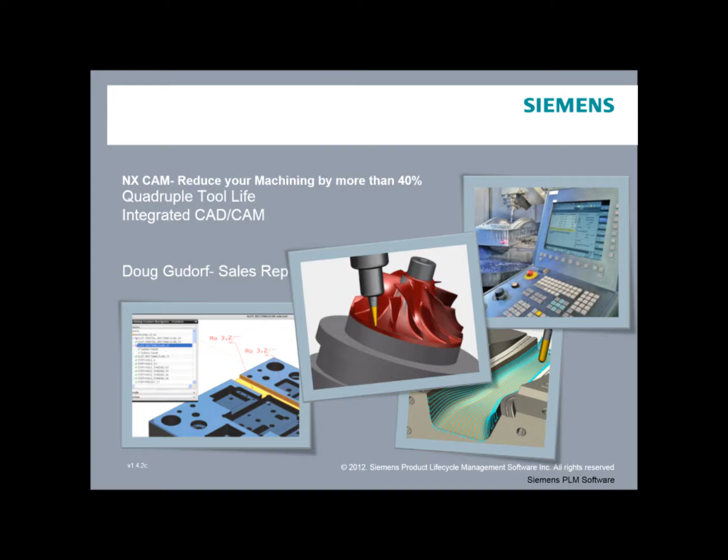So who is VMH? We obviously represent the Siemens PLM software suite. We're a platinum reseller for Siemens, and we have support. We have guys that handle any kind of technical issues that you guys may have, or questions, or whatever it may be involved with software.

We do training, whether it be on-site, off-site, or we can also send you to the Siemens PLM direct classes. We have something called a dream team, just some young guys that are engineers that solve issues and problems that we have aboard. And we have mentoring, which is we come on site, we take a look at what you're doing, kind of stand behind you and make sure you're doing all the right good things.

These are the industries we typically focus on: aerospace, automotive, electronic, medical, and machinery. We do step outside the boundaries, do a lot of job shops. But most of them fall within some categories, and you guys probably do work for some of those or make parts for those. Those are our core industries.

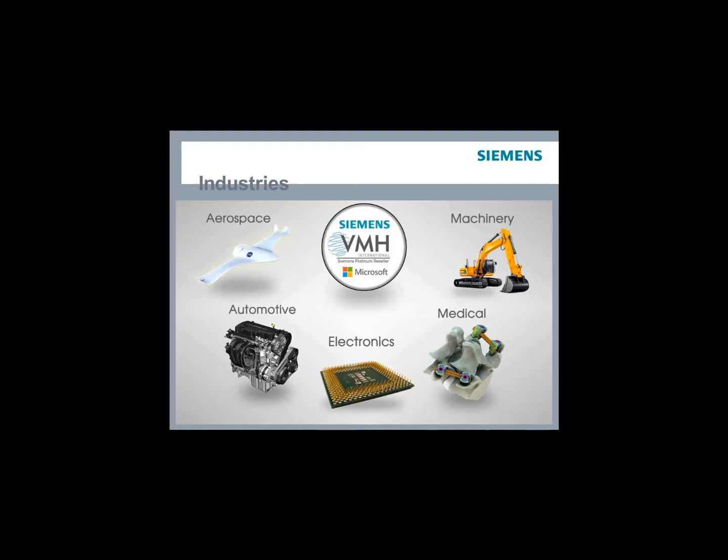The nice thing is we were one of the first partners to partner with Microsoft on the cloud-based Teamcenter product, which seems to be a huge advantage. And obviously we have a mobile training center. We can bring laptops on site. We work with technology partners, whether you guys are buying Mazak, Makino, the Pumas, we have posts and machine simulation developed already. Supplier programs, we work with GE Aircraft, work with different suppliers to get them software so they can integrate better into the OEMs.

And vast industry knowledge. I've been doing this 16 years. I came out of college with basically a quality degree, any kind of inspection, anything to do with engineering. I've worked with a lot of owners, a lot of private equity guys, and I'm just always looking for better ways to improve the process, and that's why we're having this conversation today. Next slide.

Why would anybody look at CAM? People don't realize that formerly Unigraphics, now NX CAM, we've been around. It's actually over 30 years, probably 35 years, back to the McDonnell Douglas days. The first programming language was UNIAPT, so it came out of a CAM package. We built CAD on top of CAM. That's why our CAM is so amazing.

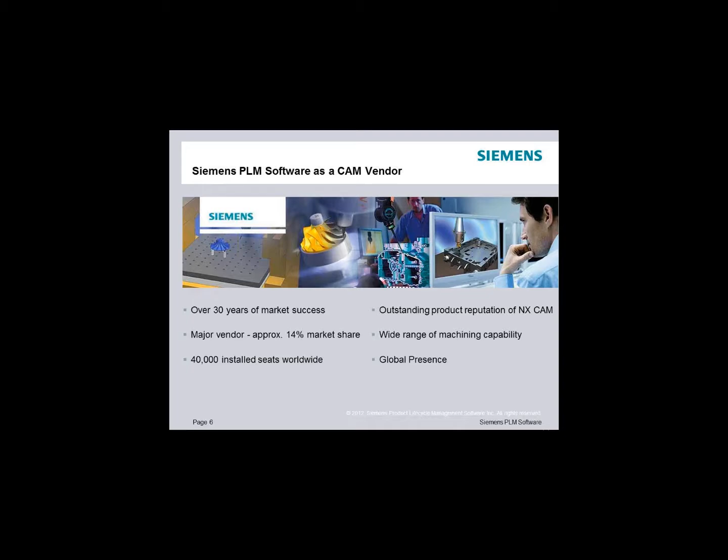We've got 14% of the market share. We're probably number 2 in the world as far as market share on the CAM side. We've got a great NX CAM product. Got a lot of users, a lot of successes. We'll talk about those. And we got a wide range of machining capability. We can do mill turns, 3 to 5 axis milling, wire EDM, or lathe. We do have a global presence. We're in almost every country, and 40,000 installed seats worldwide.

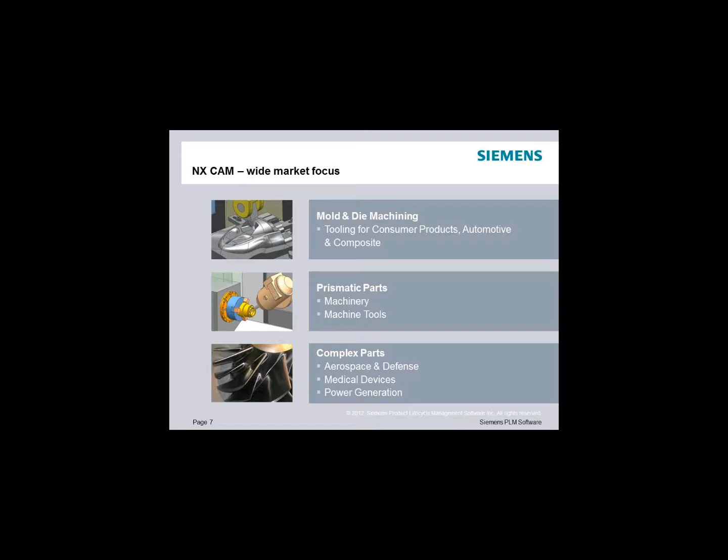These are some of the industries we do real well, and you guys are probably familiar with doing mold and die machining, which is complex surfacing, prismatic parts, round parts, simple parts, and complex parts. As you see that turbo machine, that blisk right there, for any kind of medical device, power generation, or you see aerospace cutting those large turbine blades.

We want to talk about the strategies towards the end as far as what tool you use or what machining technique. And every machining technique doesn't necessarily mean it's bad, but everybody does the software its own way to make it work. But we'll see with the volume mill and with their approaches. Next slide.

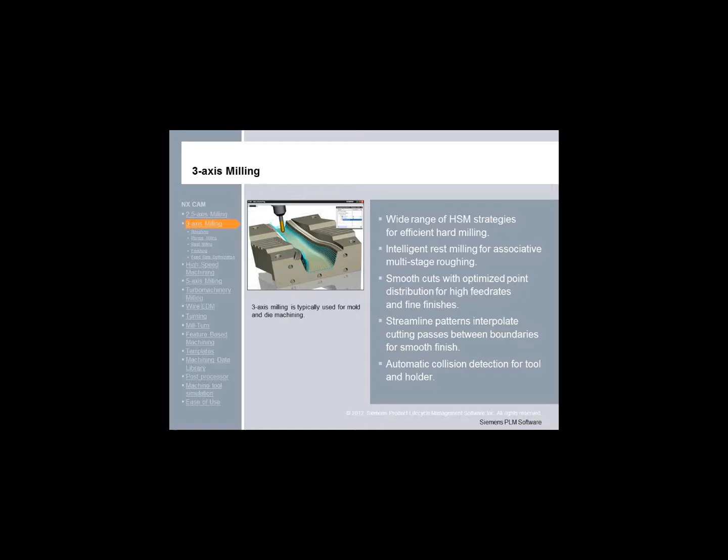So you see typically when you're roughing out material, we were the first ones to come out with high-speed milling, which is the NURBS, the non-uniform rational B-spline information, which basically is just saying, hey, if you go into a 90-degree bend, let's smooth the tool path out so it doesn't go fast and then slow down and then go fast, which is bad on the tool and bad on the machine and bad on everything. Automatic in-process workpiece.

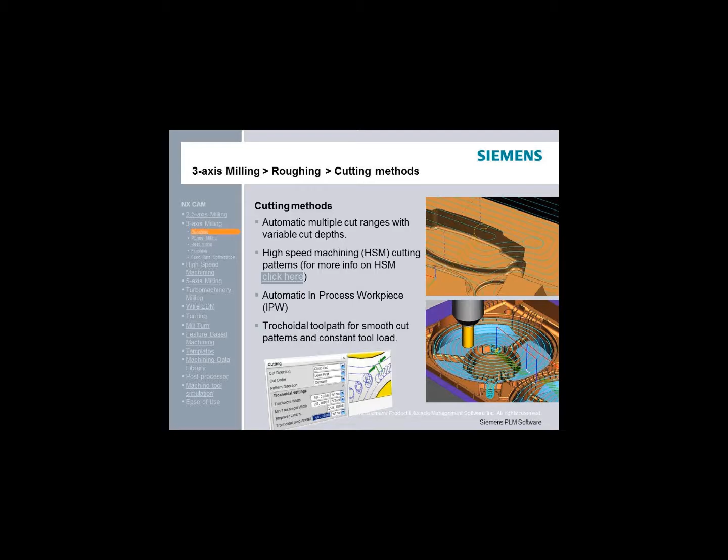So the IPW on the workpiece basically keeps track of all the uncut material. And then trochoidal, you guys are familiar with that particular method, you can kind of ramp in at circular movements, and then come back out and hit it again with circular movements with the cutting size of the tool.

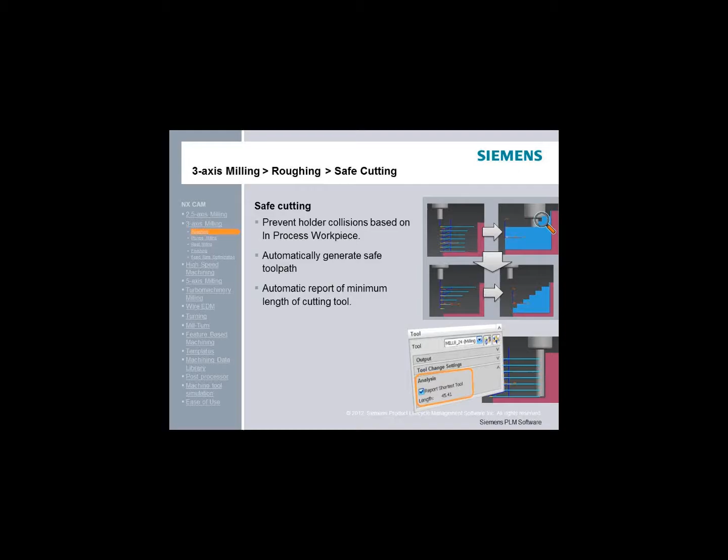Next slide. We just talk about safe cutting. I have a lot of customers asking about this too. You know, how do I know if I have a holder collision? Now we have a way of detecting this. We can also report the minimum length of cutting tool. So if you're doing a certain depth, you'll know how deep you can go with a minimum cutting length tool before you bang into the material itself. Next slide.

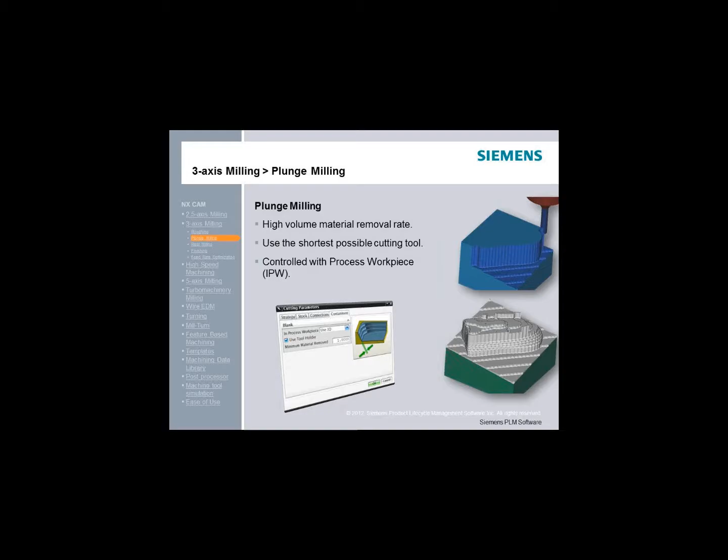Plunge milling, high volume material removal rate. Use the shortest possible cutting tool. So when you plunge mill, you want to make sure you're not banging your tool into your part and destroying your part. And I said that we control the process workpiece, because I know where the geometry is at, I'm going to leave a certain amount of material. The tool and the toolpath know exactly what's going to hit on the next pass. Next slide.

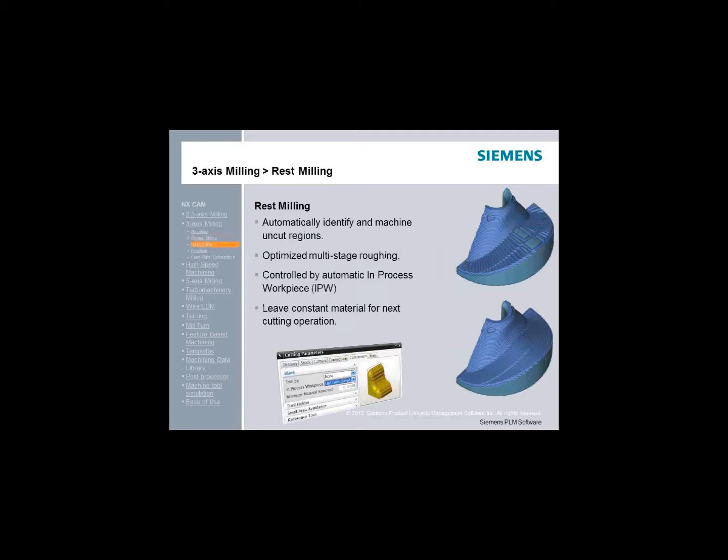Rest milling. A lot of you guys do rest milling operations. Leave constant material for the next cutting operation, which is what you guys want. You don't want to see a big chunk of material you weren't ready for. Next slide.

So we have specialized tasks. This is a high material removal rate. We have things like chatter-free machine parameters. You guys don't want any chatter because you don't want to get faceted side parts. So for trochoidal milling, consistent tool loads, so you know exactly what the tool is going to face when it goes in the material, when it comes in and out of the part. So there's all kinds of new advantages, new intelligence we build into the software.

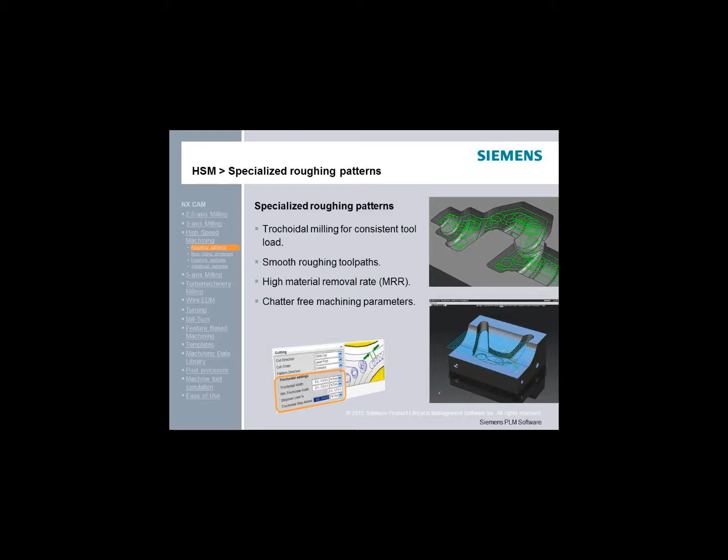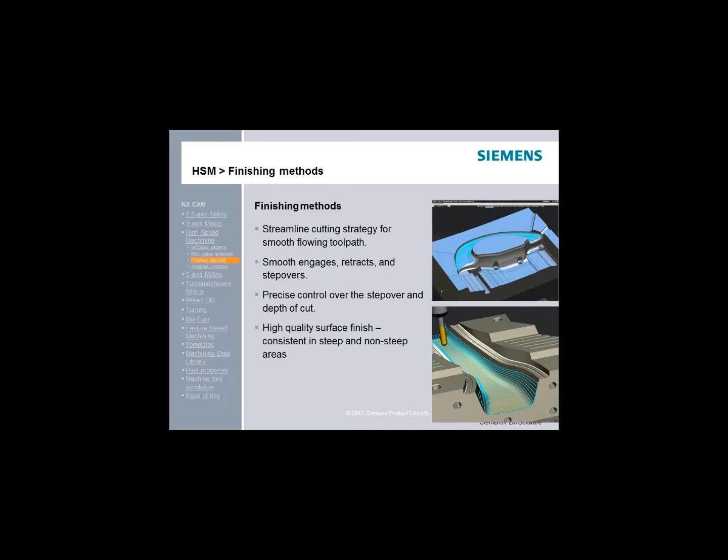And then finishing, you guys care about finishing. You want to make sure you get smooth engages, retracts, step overs, whatever control you want to have to finish the part. So you either don't have to hand polish it, or you can get it right off the machine. I've seen people do it right off the machine and get a good part. Next slide.

5-axis milling. A lot of people are getting into 5-axis milling. It reduces your multiple setups, which rolls back into reducing your machine time, right? When you've got to do multiple setups, you've got to do multiple fixtures. There's all kinds of stuff that goes into that. We do 5-axis extremely well. I've done a lot of different customers. A lot of people position the 4th and 5th axis, but we do true 5-axis milling. Next slide.

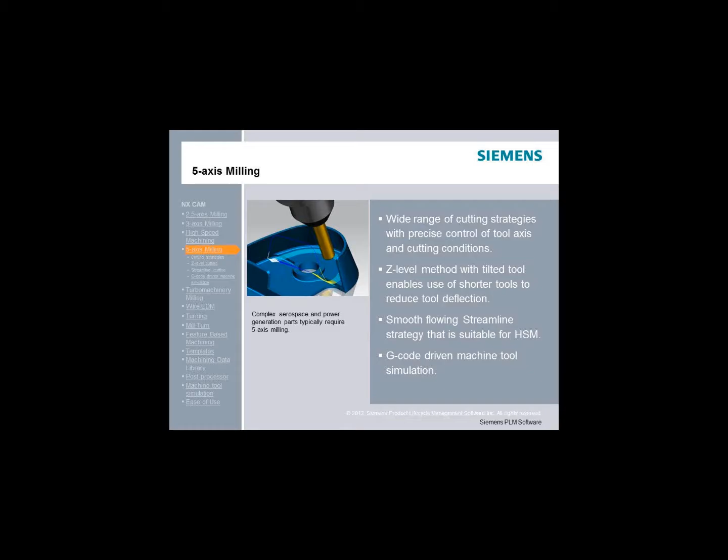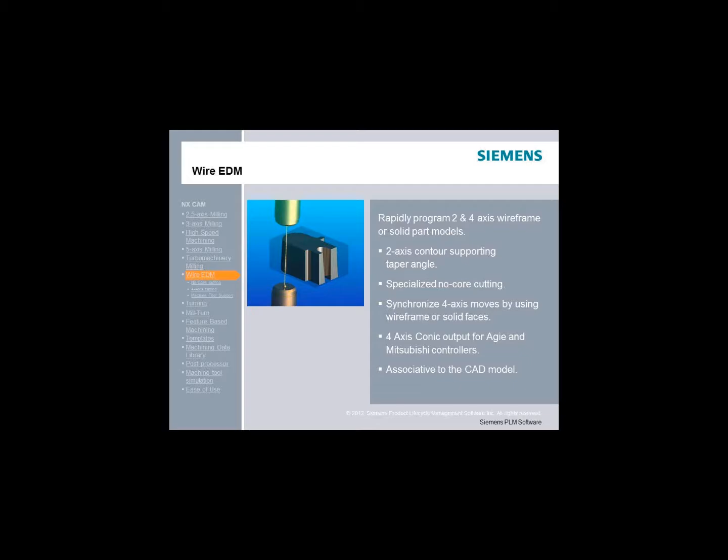Wire EDM. This is another integrated piece of the package. Next slide. Turning. So as you can see, we have full manufacturing suite capabilities. Next slide.

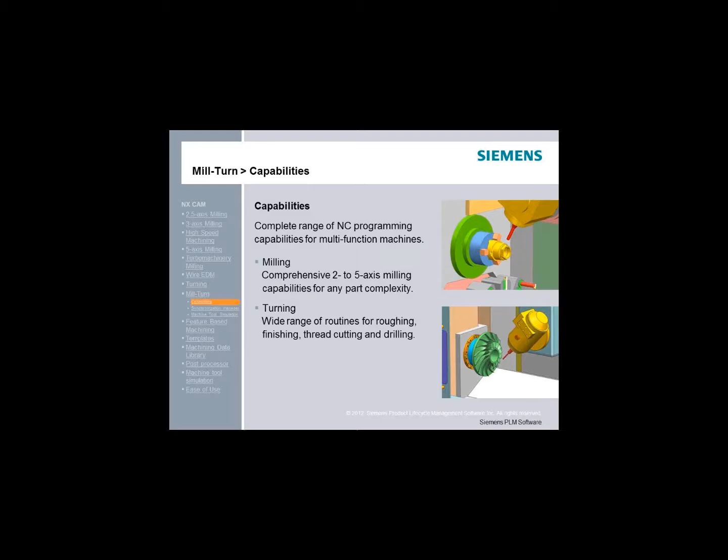And then mill turn. You guys doing some milling, some turning. A lot of people are getting into mill turn operations with multiple turrets. Go ahead, next slide. Synchronization manager, that's how we sync the heads. You're basically posting out a lathe program and a mill program, and integrating them together to make sure the speeds and feeds all sync up. You obviously want to do that when you're machining multiple parts. Next slide.

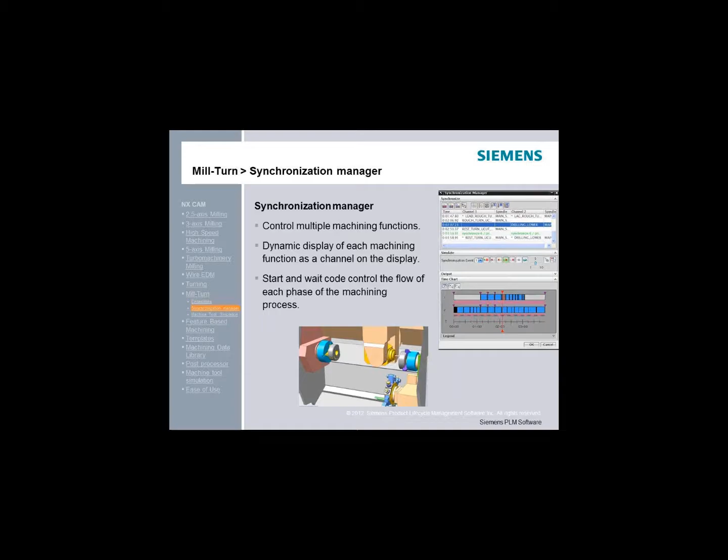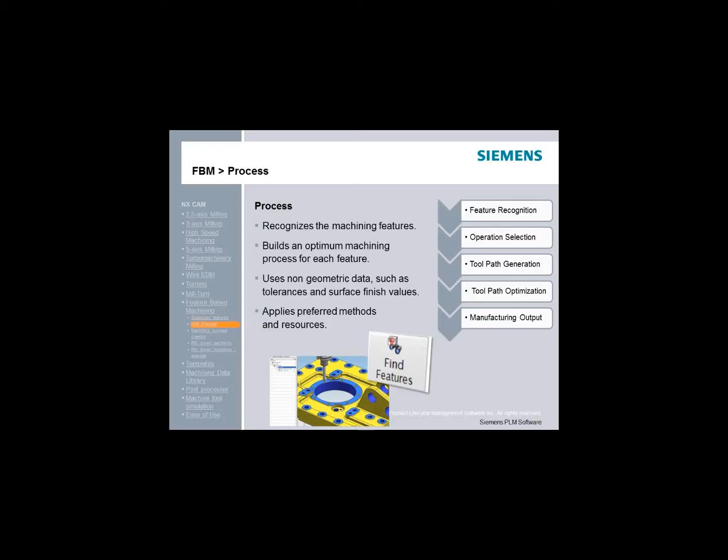So the feature-based machining, people always ask about that. Is it going to recognize holes? Is it going to recognize certain features? Yes is the answer, and it's getting more and more powerful each day. So you see a hole with a ½ inch, it knows the depth; as long as the solid model is intelligent, it will pick up all that intelligent data. Next slide.

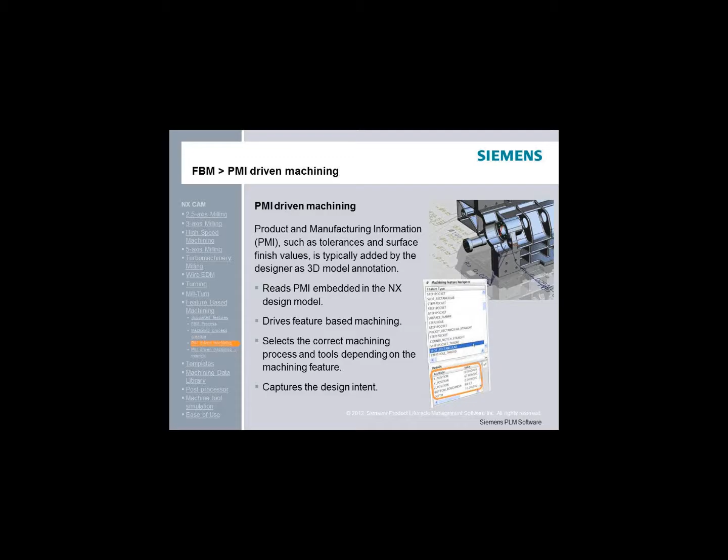And a lot of people are driving the PMI. I see this more often than not. Driving the PMI data for your CMM programming, so it picks up all the PMI information that's embedded in the model itself. It's a nice way of just having everything driven through the PMI to make sure you're staying in tolerance. Next slide.

Templates. I'm real big on templates. This is part of your savings. Why reinvent the wheel? Once you do an operation, you know your speeds and feeds, you know your spindle speeds, you know the material you're cutting, you know what cutters you like, you have your standard cutters. Once you program a part, why not copy and paste to the next operation, and then you can just adjust your different geometries or whatever else on that part.

I see so many guys reinventing the wheel, going through the ladder, as I call it, and it just takes too long to pick all those pieces. I would just copy and paste to the next operation. That's where Barry has been so successful. Next slide.

So your machining data library. On those end mills, it tells you what kind of material you're going to cut, and basically any intelligence you would need to know for the type of steel you're cutting. Like if you're cutting hardened P20, D2, A2, any kind of hardened steel, it's going to have all the intelligence built into it. And keeping track of all this makes your life a lot easier.

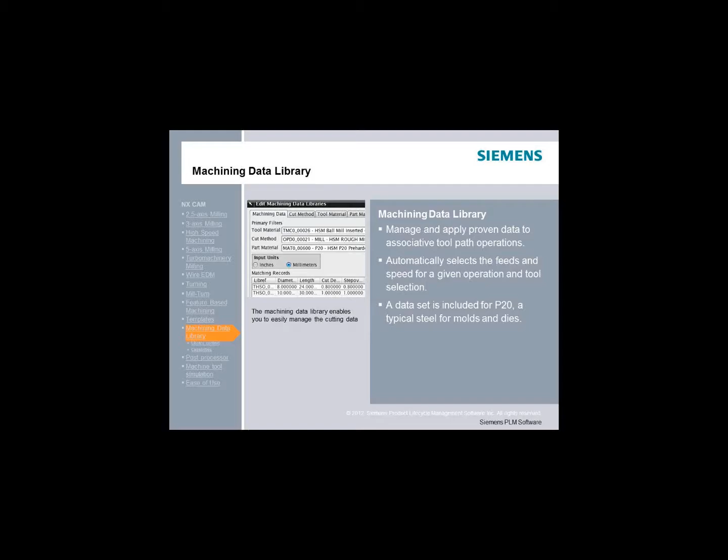Instead of going to the tooling vendor saying, what type of material can I cut, how many flutes do I need, how big of a tool, you can use standard tools to do all these different things. Next slide.

So the machining data library enables you to basically manage your cutting conditions. You're probably cutting similar materials each time, but you want to do them more efficiently every time. And you certainly don't want to be dry running machines or testing out G-code when you can be cutting parts. You could use simulation like a Vericut package where you're doing offline testing of your programs and not dry running your machines, which is another savings. Next slide.

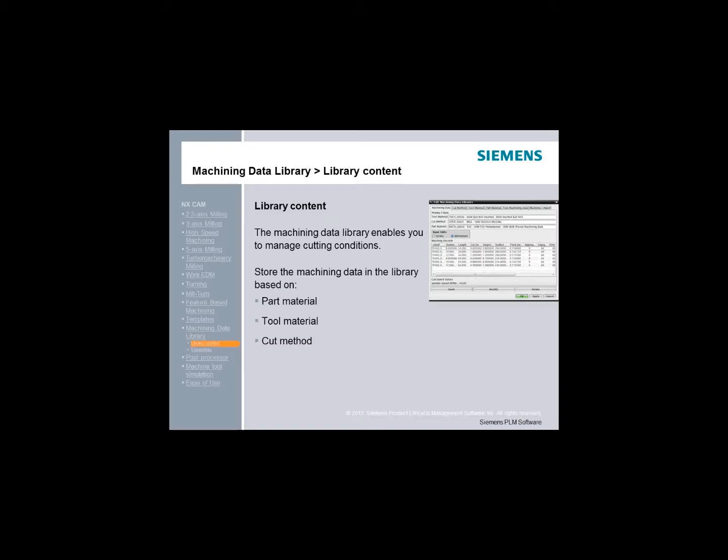Post-processor, you care about that, whether you have a Mazak, Makino, Hardinge, whatever you may have. We have a post library. You can either build your own posts, or we have posts online, or we can develop the posts for you. You can also go outside to ICAM or InterSim; they write external posts as well. So you have different options to get your data out to the machine. Next slide. This is basically our post library.

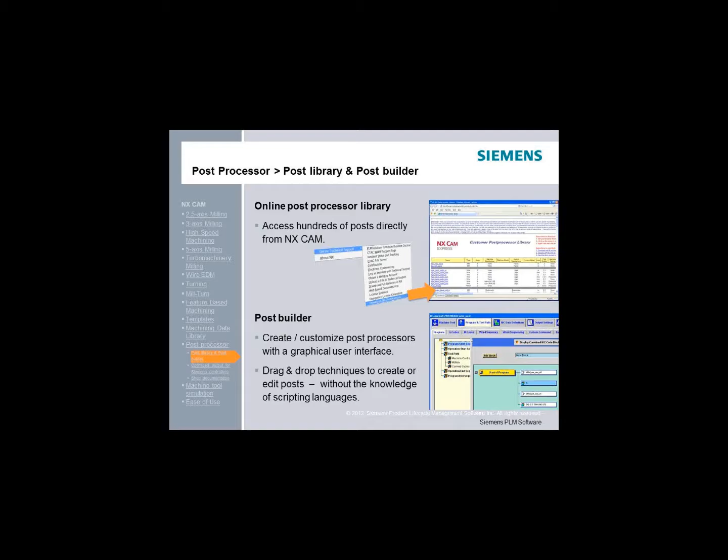And this is probably the number one question people have when they buy the NX CAM piece: how do I make this more efficient? And if you have an existing post today, how do I optimize the data coming out of my post? We can help you with that as well. Next slide.

And I know Barry uses this for his setup sheets for shop documentation. The guys on the floor want to know a T01, T02, T03, what kind of tool it is. Barry defines all that, so they know a T09 is a 5/8, for instance, and what they're looking at on the floor. It also keeps track of the IPW, so the guy knows when he gets to a semi-finished operation what the part looks like. If something's out of whack, he can say, it doesn't look like the photo.

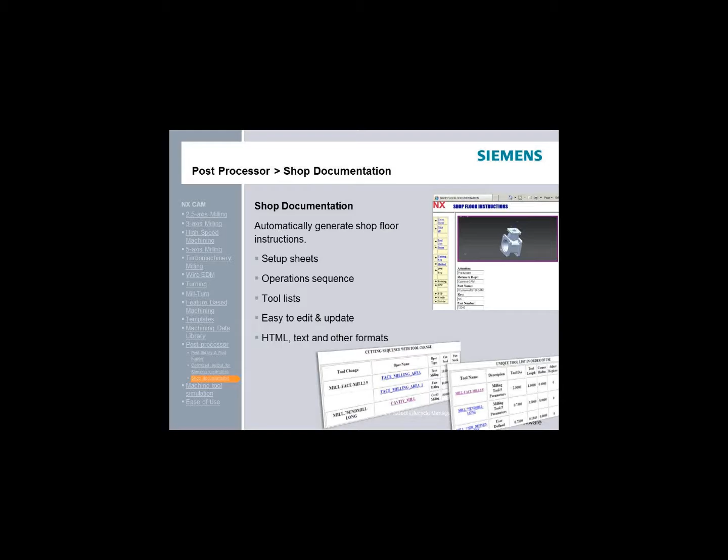It can be HTML based. They can click on this and have an interactive live viewer. It's really endless, and you can customize it just for your shop floor. You could have XYZ custom job shop, cutting part 1, 2, 9, 10. Next slide.

Ease of use. I know we're talking about reducing machining, but with ease of use, you want your guy to not use it for a couple of days and come back and know exactly what to do. We're trying to make the interface and the menus a lot easier. We talk about templates, we talk about all the important things. All these play into making you more efficient. Next slide.

So with the interface, we're allowing you to make your jobs go a lot easier, and you can find different things because we do so many different things. It's just easier to have a command finder. You can go out and find stuff. Next slide.

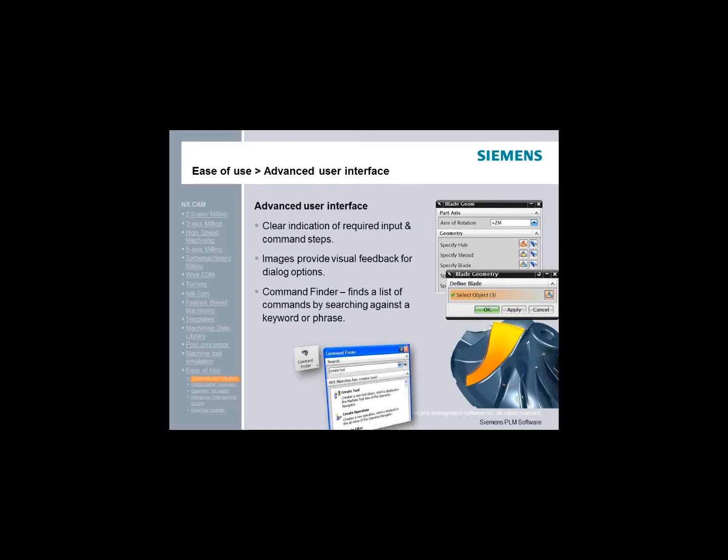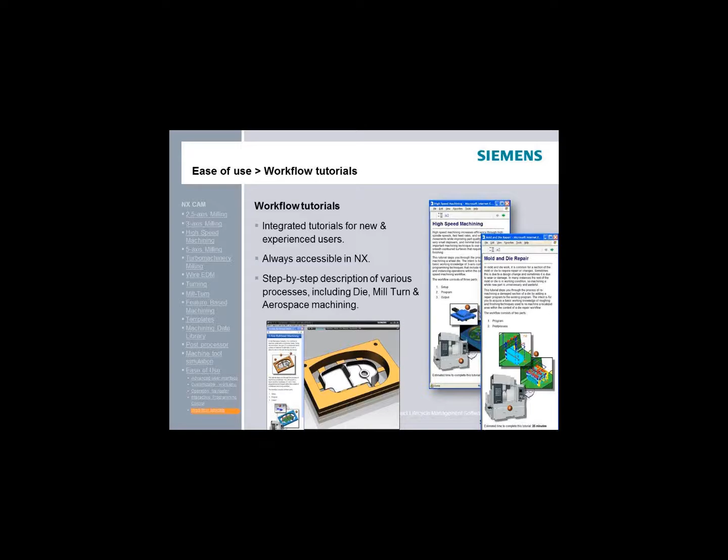What does it do? Roughing operation. What's the majority of your time? Roughing the material. I hear guys could take 10 thou off a part, or an inch and a quarter at max, at max speeds. So we're able to use the side of the tool instead of the bottom of the tool. Like an end mill, we're using the flute length to cut the part. It's a new, different way of thinking.

Every time someone shows someone the part, if they're cutting it... I did a test cut at SC Tool and Mold. One part went from 8 hours and 30 minutes to an hour 10, which is significant savings, but it was a whole new methodology, and they're getting 4 times tool life out of those tools.

So we're talking about reducing machine time. What does that mean? It means if you have a CAD system and a CAM system that's integrated, that's going to play into it. How do I set up a template? How do I make things easier? How do I keep track of the standard tools I use? Because the more standardized tools you have and not specialized tools, you're going to save yourself some money.

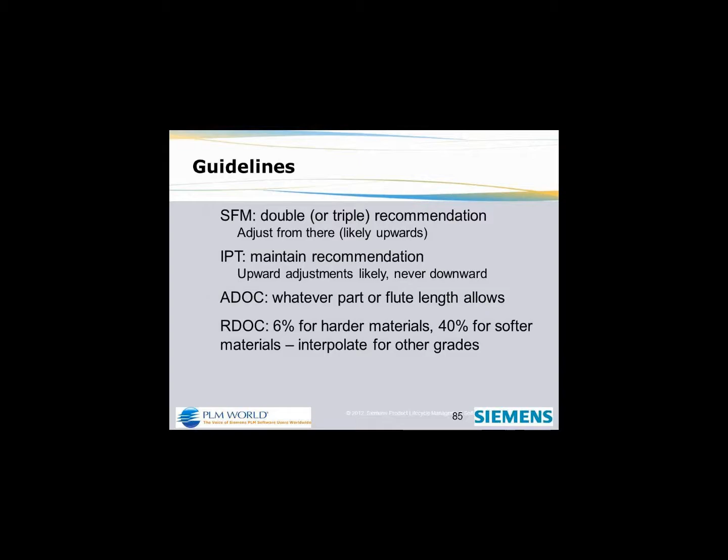Why VoluMill? I've been selling VoluMill for over a year now. To be honest with you, I didn't know that I believed it in the beginning until I saw a part cut at AFC Tool. When I saw the part cut, I thought, wow, there's a lot of time that's spent hogging material out and very conservative ways of machining. But no one has that advantage anymore with the overseas competition.

You've got to make things quicker, faster, optimize tool life, and you just don't have the opportunity to machine the way you used to machine. So I saw this, and I thought it was an opportunity for American manufacturing to take advantage of this new technology. For $5,000, its payback is literally 2-3 days on some of these jobs I've done. It's inexpensive. It's simple.

Literally, if Barry spent a half hour with you, an hour, you're going to grasp what he's saying and what he's doing. It's unobtrusive. It runs inside NX CAM, CAM Express. It runs external to Gibbs, and whatever you may be using, it will work. It has an immediate impact in ROI, which means, if you're machining an 8-hour part in an hour, it doesn't take you a while to figure out that you're saving a lot of money. You're able to quote jobs a lot cheaper.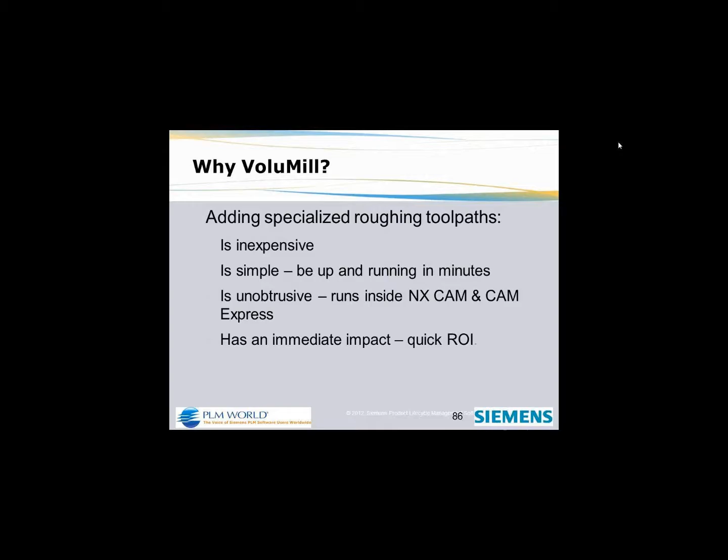I've been doing this a long time. I've seen VoluMill will save you a lot of time. The way you approach the machine operation, having the operators believe in the process in which they're not cranking down feed rates, that's what kills everybody. They're getting conservative: I want to take an inch depth cut, I want to take a 1/4 inch depth cut. So you got to kind of trust the software and what it does. Next slide.

So let's get Barry on the phone here. Let's have a little conversation with him and ask him a few questions. How you doing, Doug? Hey, Barry, how are you? Doing fine. Glad you can join.

As you know, I've been calling AFC Tools since 2005, and I sold some of the first seats to Rob Kyra. I think you were joining the board just about right then. You guys have come a long way. Why don't you explain where you were in the beginning and where you are now? Because I think that's a drastic difference. And I want you to talk about what VoluMill has added as an additional icing on the cake, so to speak, for NX CAM.

Well, within the last 5 years at AFC, we've gone from sending out any type of detail that required the machine to move in 3 axes, i.e. X, Y, and Z, to adding first a mid-size Hurco, a 3-axis machine, and then a large Hurco, basically a 64-inch X travel with the addition of a 4th axis. And then our latest, a 3-meter bridge-style 80-horsepower Hurco, 4-axis capable also.

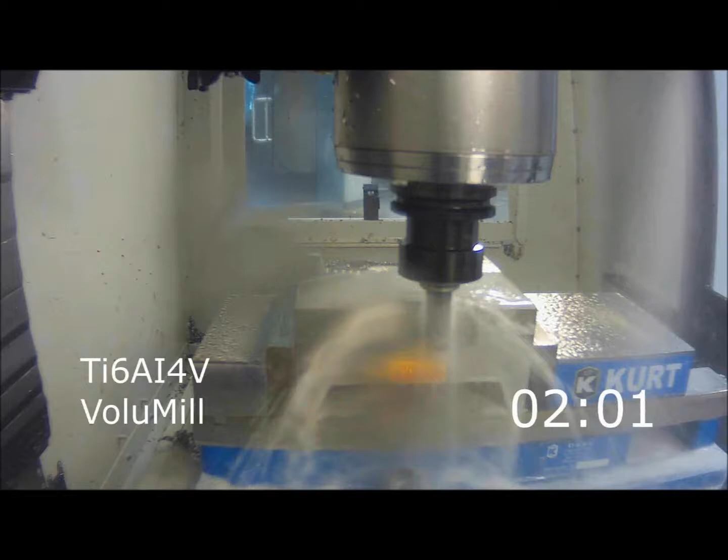So before I get started with NX CAM, I'm just going to play a video. We went to Sandvik in California for a VoluMill event, and we took one piece of titanium and split it in half. We did one half with VoluMill, the other half with the conventional cutting method, so we can see the difference in how long it takes.

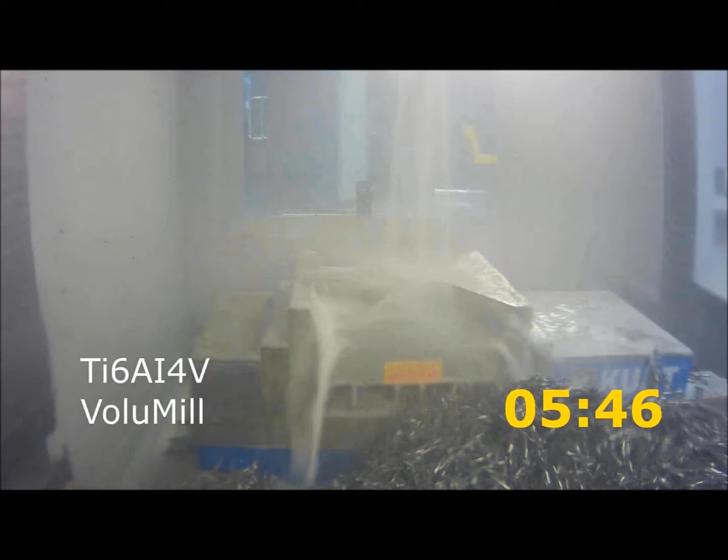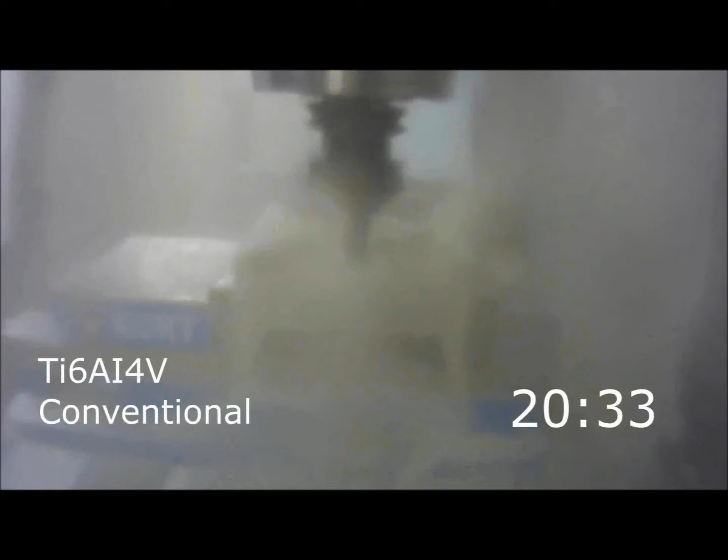So with VoluMill on a piece of titanium, as you can see, it'll stop around here. It took about 5 minutes to do. And there's your finish time, 5:46. And then after that, we did it with the conventional method, all on the same day. We had this over lunch, with all types of companies there as well. And here, we're already at 20 minutes, and we're not finished yet with the conventional method. So already, it's 4 times as much as VoluMill took.

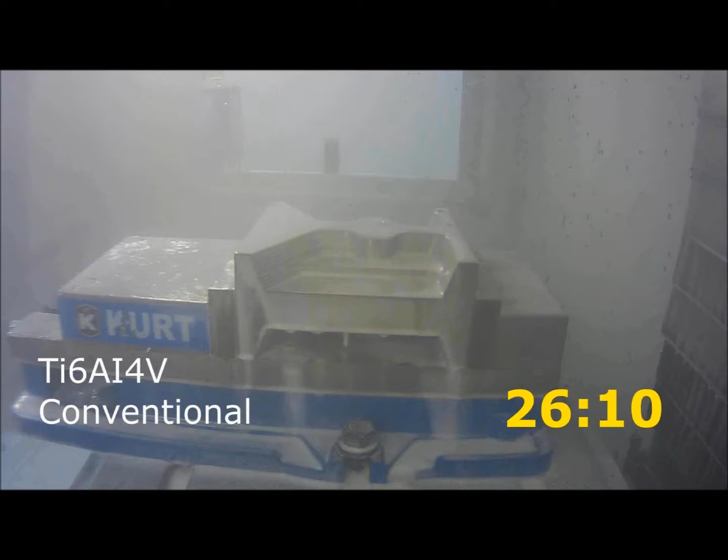And again, it's great to see customers talking about it and the sales guys talk about it, but then again, it's great to see it actually in motion and seeing that it does work incredibly, and to save right now over 20 minutes off a part. If you're doing this part day in, day out, not only 8 hours a day, but with a night shift, think of how much time you're saving on one part. You're saving that 100 times a day. You're saving a lot of time and money. So there you go, the finished result, 26 minutes 10.

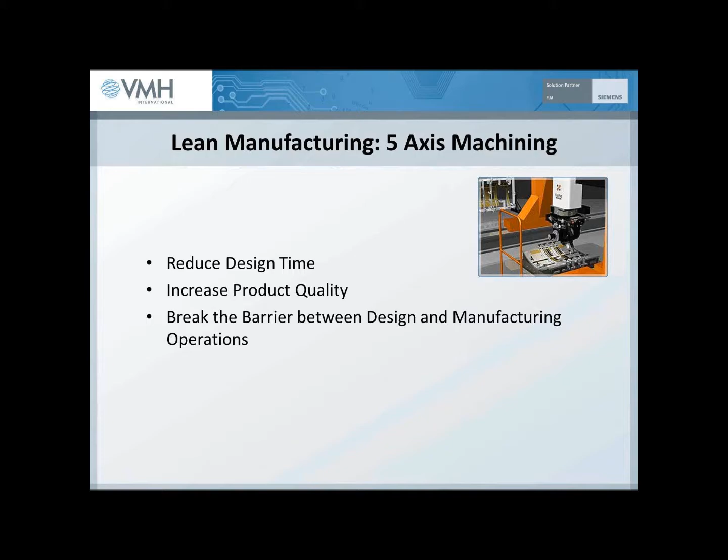As Doug said earlier, it'll save you money, and you can make your money back pretty quickly. Also, Doug talked about Learning Advantage. Here's my Learning Advantage here. It's a great way. It's actually pretty cheap, and you can have it anywhere. It does everything. I have CAD, CAM, CAE, and then in the CAM you can learn everything you need to know in NX, drilling, turning.

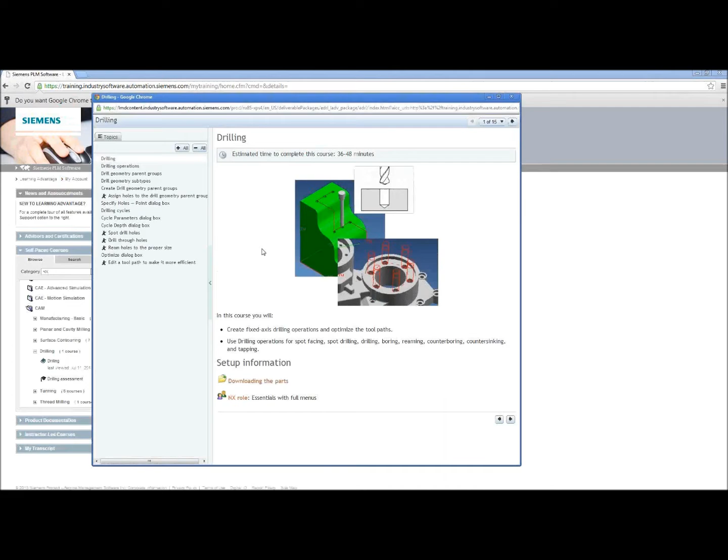You click on an activity, and then it lets you download the parts that you can use. So you can download the parts here, and then you can learn with videos and pictures the different applications in NX, and then it has activities for you to do to learn how to do it. And it's all just repetitive, trying to figure out the best ways to use all the tools in NX and how to use them. So pulling up NX, I'll move it over.

The best part about NX CAM is that it's all in the same system. So if you have a competitor software, you have to make it a STEP file and then bring it into your CAM. It's all built into NX altogether. So I can go from modeling here, drafting, over to CAE and manufacturing. So with just the click of the mouse, I'm in manufacturing instead of having to export it into a different program. It's all in line, it's all together.

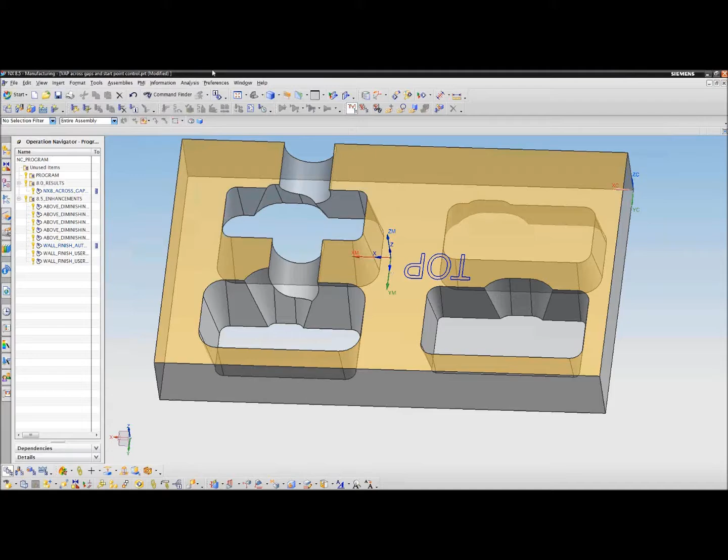And what's also great about NX is if you make a change in CAD, so if I were to go back to modeling and just change one little part of this where the cutting path is, it will go downstream, and with the click of the button, it will update the CAM paths you've already made. So it's quick. With a competitor, you'd basically have to change all your toolpaths again, but here it updates it automatically with the synchronous technology involved.

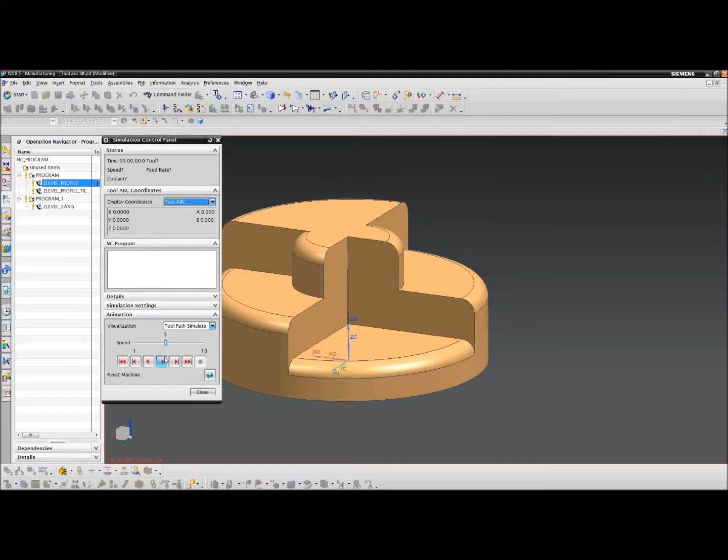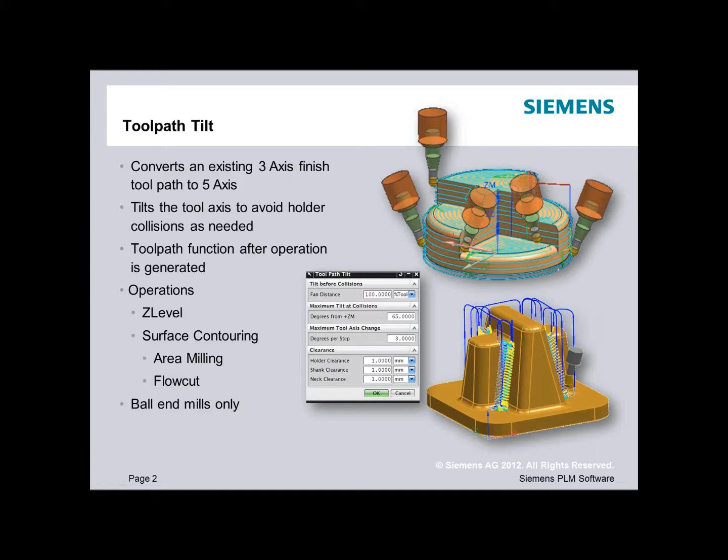And one great part about NX is you can go from 3-axis, which we have here, and I'll show. Here's a 3-axis cut. Pretty simple on this. It's the mold here. If I speed this up, this takes about 26 minutes to do. And then what's great about NX is called the 3 to 5-axis toolpath tilt. If you go from a 3-axis to a 5-axis toolpath, just with a wizard, it lets you pick an angle that you want to tilt your tool at, and it allows all your 3-axis to go into more of a 5-axis tool. So it's a good first step to getting into the 5-axis mentality. And I will show that back in NX.

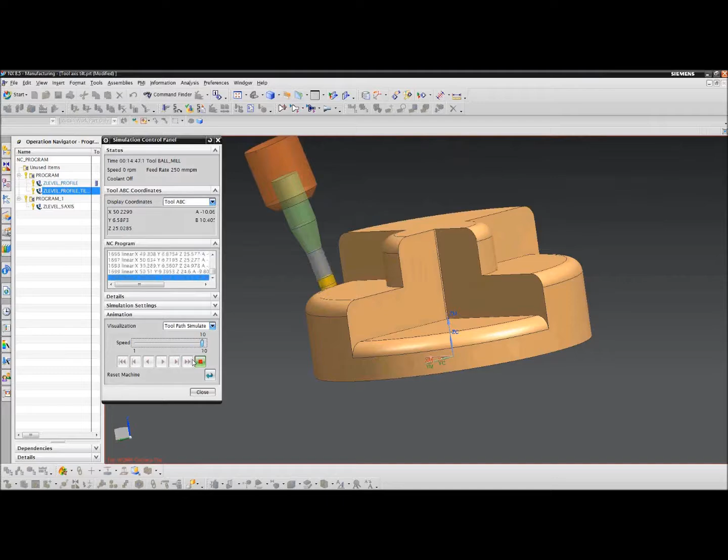So here's the tilt. The tilt on this one actually takes a little bit longer, but again, with the angle on the side pass right here, with a little bit of a tilt, you get a better finish and a better angle. And if we go through quicker, this one takes about 33 minutes. And then if you go 5-axis, which I will show next, it's at 17 minutes there.

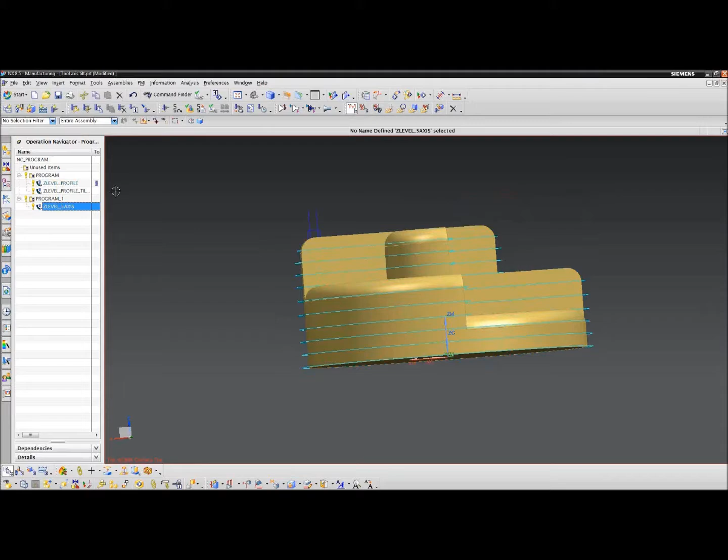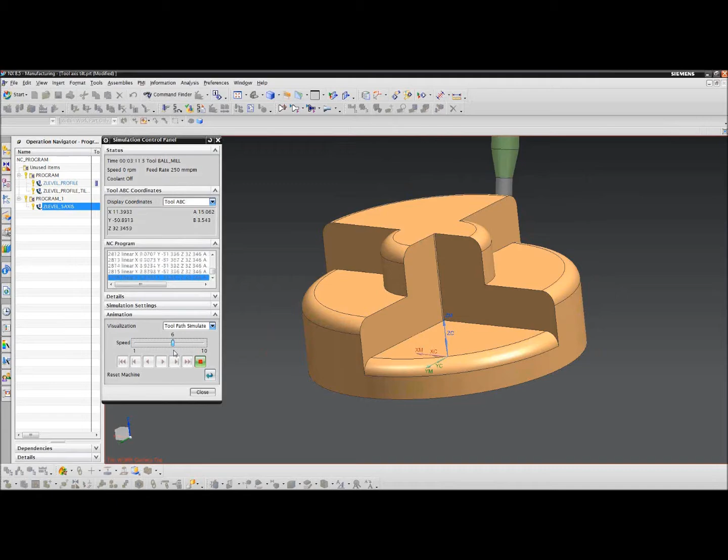5-axis, the first thing you can tell if you look from 3 to 5, you can have a deeper toolpath, as well as you can save time just by not having to reset this part over and over again. So if you have a big aerospace part that needs some big piece of machinery to move onto your machine, or even a small medical part, if it takes some time to get it precise beyond millimeters, every time you have to zero off the machine, it takes time. If you have a 5-axis machine, you do it once, get it zeroed off, and you're done.

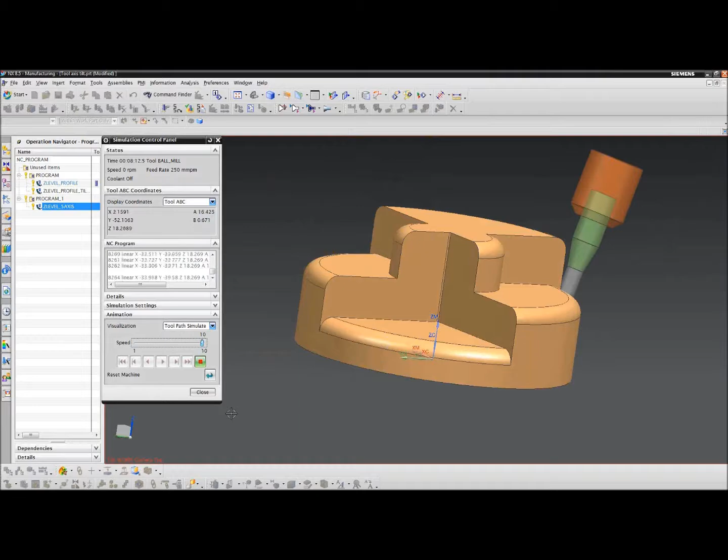With this part, if it was a 3-axis machine, it'd be best to set it up on this side, cut these parts, and then set it up again on its side. It's better with a 5-axis just to set it up once and use all the angles possible to machine it and also to save time. And this one, I think the 3-axis took 26 minutes to do. This one takes about 17 minutes to do. So just with 5-axis, it saves half the time.

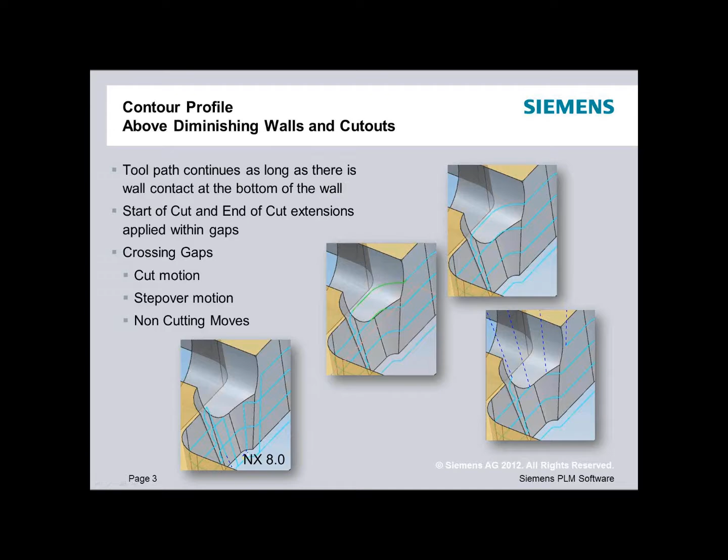And another great feature, just one that's new in NX 8.5. If you're going across walls and cutouts, in NX 8 it would have to go around the wall, kind of underneath it, and that just takes time. The tool has to figure out where it is and then go around the wall. In 8.5, which is new, for those of you who haven't upgraded or are looking to upgrade, it goes more of a cut motion and step over across the gap, so it saves time just by not having to go as far across the path.

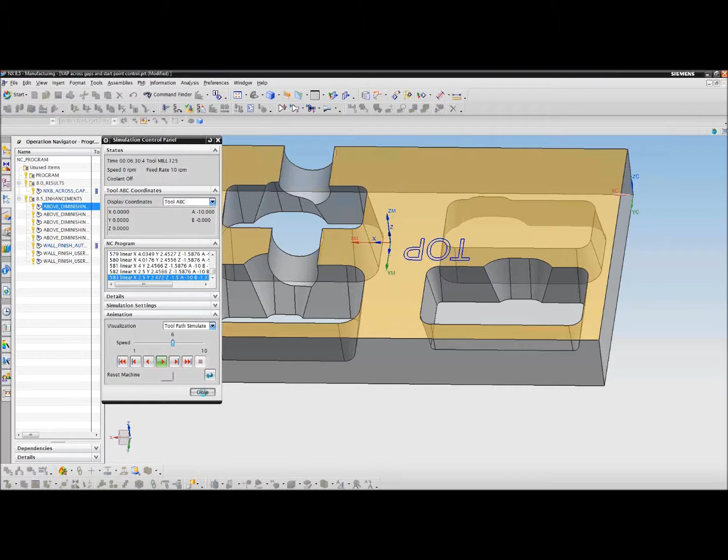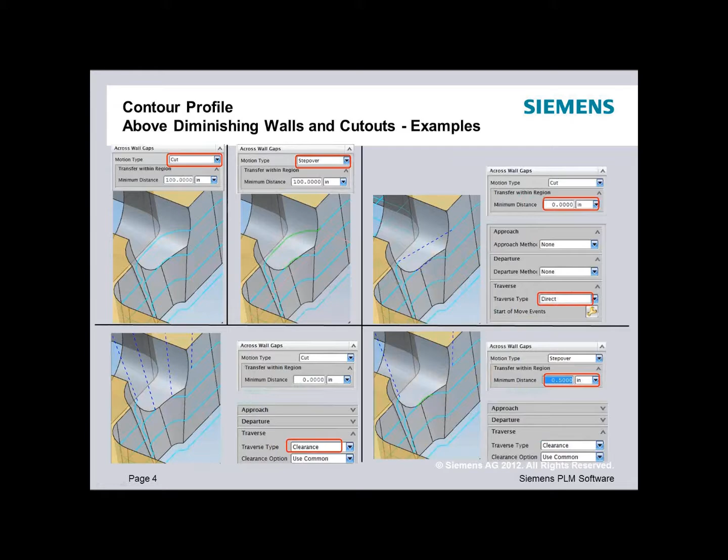So here we can see what it is in NX 8. It has to take its time to dip around that cutout there. And then there's multiple different cuts you can do in NX 8.5, where it kind of goes through the cut, not as if material were there, but it notices there is no material, and it can go through it more or less to keep it going. There's another example of that, of the different tools you can use, anywhere from cut, step over, multiple different things you can do.

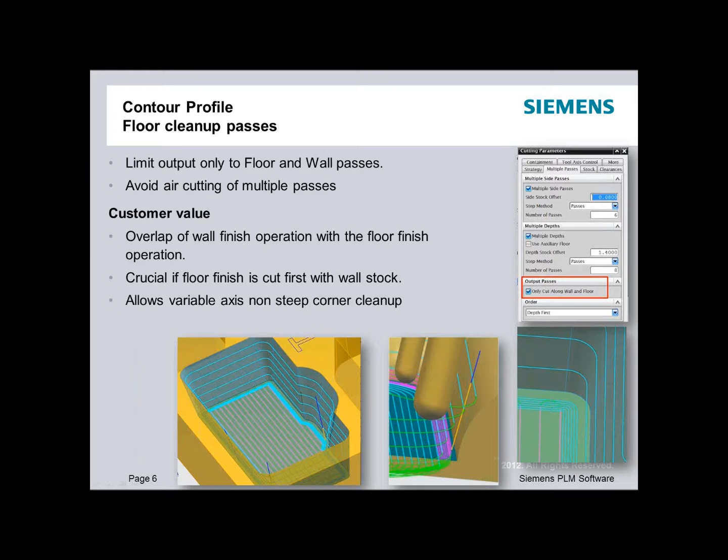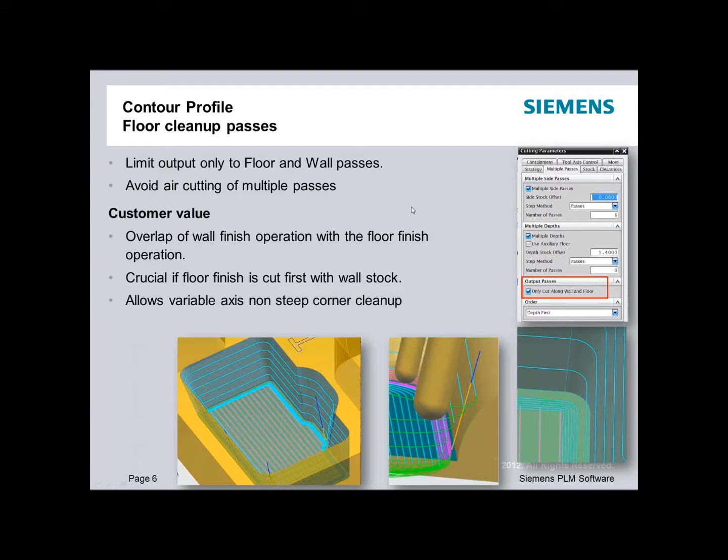As well as with that, there's the floor cleanup. If you overlap the wall finish operation with the floor finish operation, it avoids multiple passes, which makes your machine time much shorter, which is, of course, what we're trying to do. You'll hear that a lot from Doug and myself. We're trying to save you guys time and save you guys money. That's what NX and ViMill are all about.

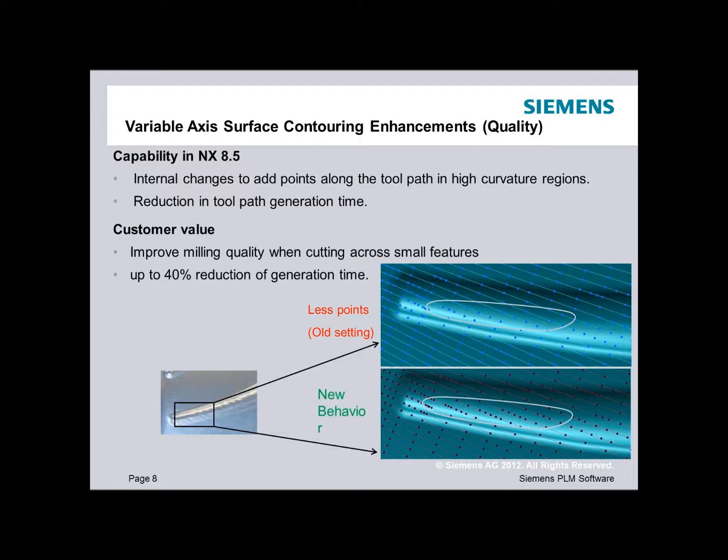Here are some other milling enhancements that we have with NX. Some are new in 7.5 and all the way up to 8.5. One is a variable axis surface contouring enhancement. So with the path, you can see on the right, there's just a lot of dots. That tells the tool where to go. In older versions of NX, there were just less points, so it's not as accurate. But with NX 8.5, we're able to put more points in, which gets us a better finish and less time generating the toolpath on more complex parts, as you can see on the left side. So again, saving time, saving money, trying to keep you all happy.

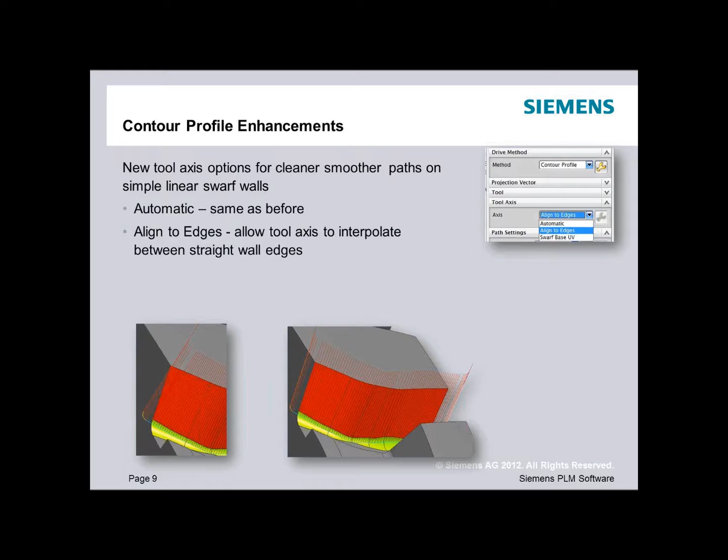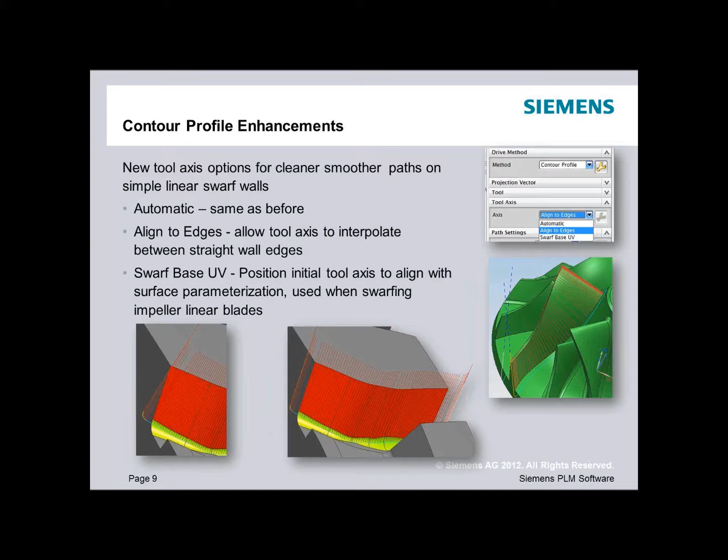Another new thing is for contour profiles, if we're looking at those impellers. We get a cleaner, smoother path on this in 8.5 than we did in older versions. There are different options you can use in your wizard for this. You can either do an automatic, as you could before, or you can align the tool to the edges, which allows the tool axis to move between the straight wall edges as well as the Swarf Base UV. You can position your tool axis to align with the surface, and then use that to go between the blades.

And one more great thing about what's new, and this is in 7.5, is the finish on the blends of those impellers and turbines. It's a smoother finish and a quicker finish. You get full control over the entire cut area, so you have more control over what you're doing and how to make that blend and that finish as good as possible.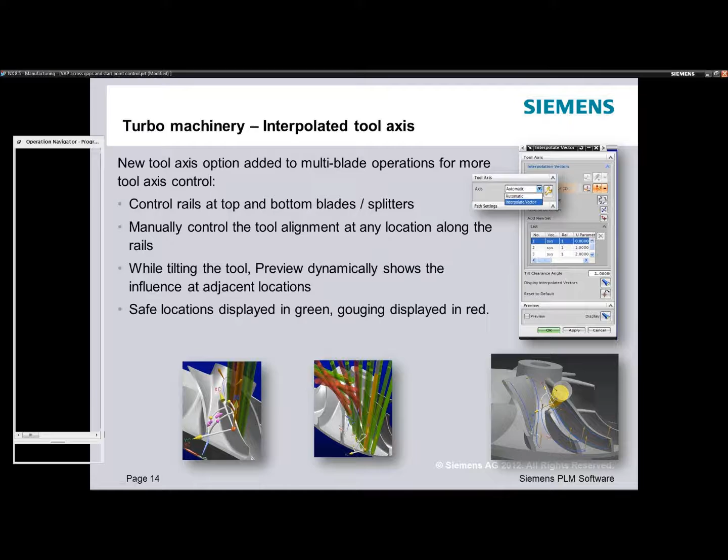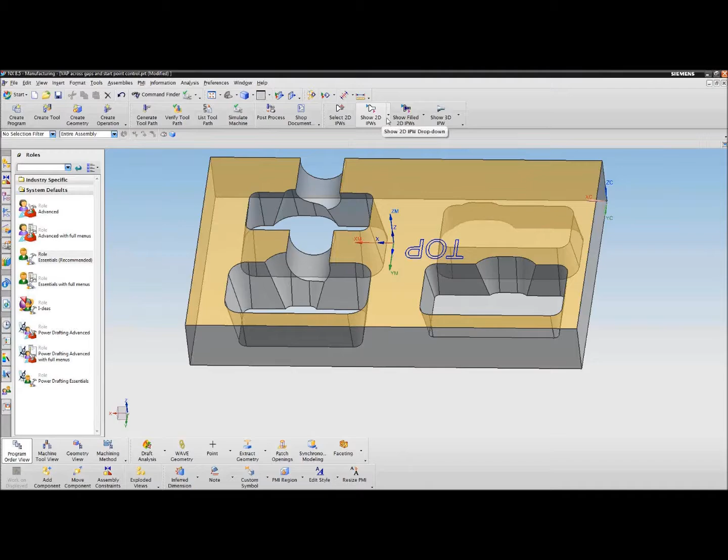And just some more with NX, there are different roles you can use. Mine is all pictures. You might not know what any of these are, but if you're a beginner at NX, either CAD or CAM, you can go to an Essentials role where it gives you pictures with the words, so you know, okay, that's to simulate the machine, that's to see what the path is doing. So you can go from this, where it's nice to know what the tools are, or once you get used to NX for a while, you can hide those and go for the bigger.

I know all modelers, most CAM guys, we all like the big screen there to see our part the best and to use the most space as possible and keep all these buttons aside. And with NX9, which will be coming out soon, they're going to more of a ribbon toolbar, kind of like all the Microsoft Office products. And it will be a little more robust than Solid Edge. You can edit it, and you can edit whatever.

If you have tools that you use more than others, you can put them on the front part of the ribbon, and it's fully customizable, so you can edit it however you want, and you can also go back to the original view that we have here.

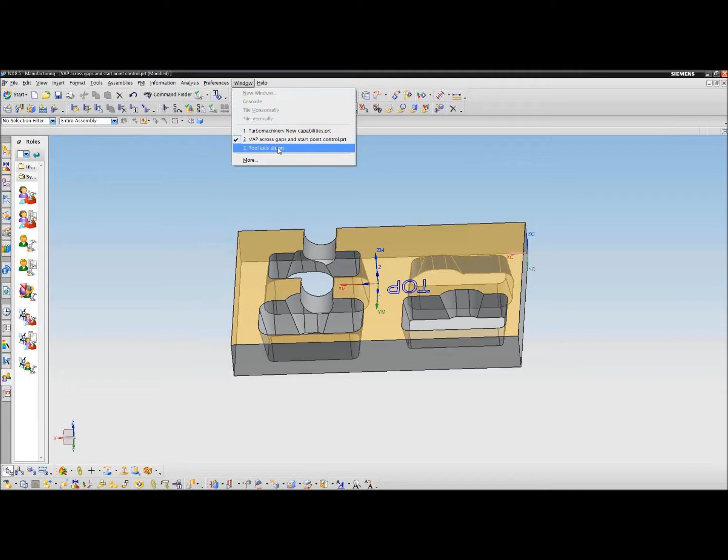I like to try to break CAM software. So. Oh, hey, I can't blame you. These are the only ones I have loaded on my machine right now. Actually, this is a loaner machine, so okay. I can get back with you, I can give you a call in a couple hours, and we can take a look at that if you would like.

Specifically, what I'd like to see is, can you adjust the tilt interactively for just specific areas of the toolpath, or does that apply the adjustment to everything on the toolpath? All right. That's something I could look into. I believe you can do each part, as you said. It's not just total. I think you can pick different parts of it to adjust different angles, and that's something I can definitely look into, and I'll send you an email or a call back with that. Yeah, the toolpath editor can do that. All right.